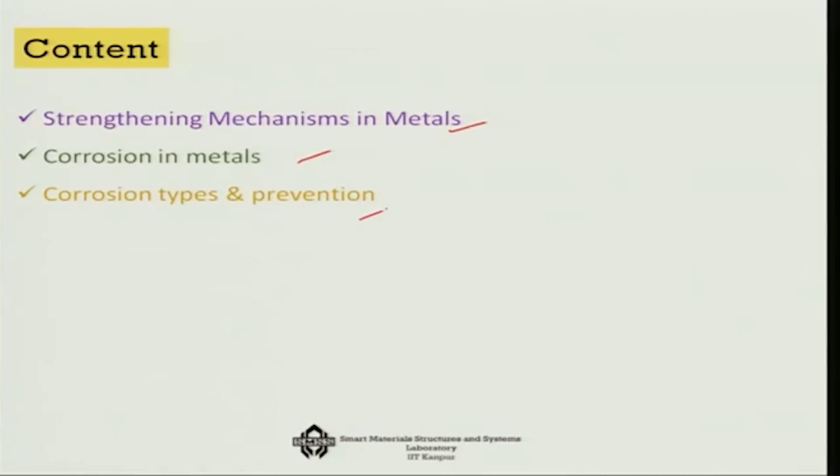strengthening of metals. Now, also because of the basic metallic nature, there are always susceptibilities to different kinds of corrosive environments. So, that also we will talk about in the second section. So, both strengthening and corrosion of metals is what we are going to discuss today. Okay. So, strengthening mechanisms in metals, corrosion in metals, and some of the corrosion types and their prevention. This is our object of study today.

Now, first of all, the strengthening mechanisms in metals. One thing we have already seen is that dislocations, if present in a metal, actually degrade the material properties. Now, as long as the dislocation is limited inside a particular grain, there is no problem in the sense that the macroscopic properties will not be that much affected. But if many adjacent grains get affected by dislocation, then that would substantially affect the mechanical properties.

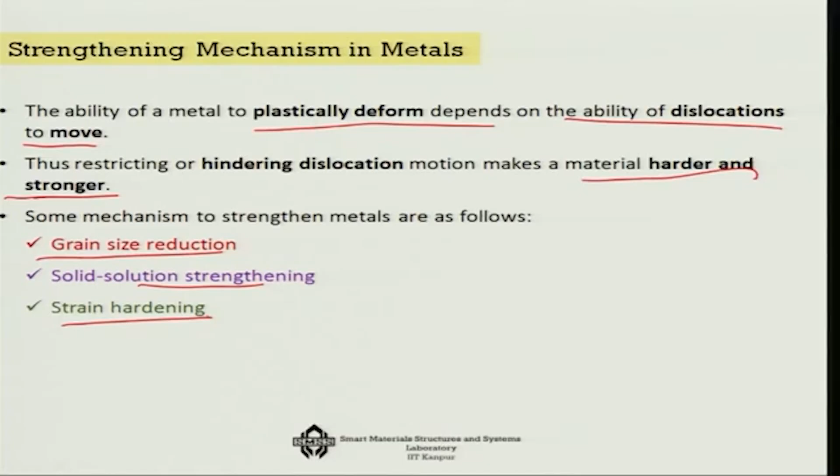So, the ability of a metal to plastically deform depends on its ability to dislocate and these dislocations to move across the grains. And if you can stop this movement across the grains, then you can make a material harder and stronger. And there are several ways by which we can do it. One is through grain size reduction, another is solid solution strengthening, and then of course there is strain hardening, precipitation hardening, etc. So, let us look at some of them one by one.

So, first of all, we discuss grain size reduction. Now, the grain boundary acts as a barrier for dislocations, as we have just said, but how does it act as a barrier for dislocation? There are two reasons. One is misorientation. That means if two grains are there and their lattices are not oriented, then it will be difficult for a dislocation to pass into another grain. Okay. So, there is a loss of alignment between the lattice structures of the two grains.

Okay. So, suppose in this particular example, you consider this to be one grain and then you have this one; the two lattices are not aligned. Okay. So, there is an angle. So, then it will be difficult for a dislocation to move from this to the next lattice. So, that is what is called misorientation.

Now, imagine that in terms of number of grains in a particular surface area, if you have more and more of these grains which are misoriented with respect to each other, then it will be more and more difficult for the dislocation to affect all of them on a statistical scale. So, the more grains it faces, the more difficult it will be for the dislocation to pass. So, that is one of the reasons why smaller grains, that means more grain boundaries, would very effectively stop the dislocations from moving across the grain boundaries.

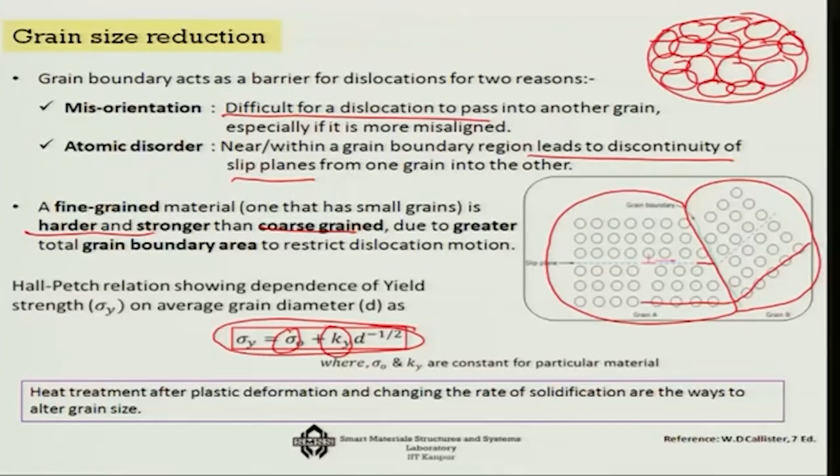Interestingly, Petch later saw that this is not only for mild steel; the same thing happens for other materials also, and people have found through experiments the values of these Hall-Petch constants. For copper, sigma 0 is 25 MPa and K is about 0.11 MPa meter to the power half; for titanium it is 80, 0.40; mild steel 70, 0.74; Ni3Al it is 300 and 1.7.

Now, one important thing is that it is K which determines how much effect d will have on the overall sigma y. Suppose I consider mild steel, with grain diameter from about 100 nanometers to about 1000 nanometers, and sigma 0 and K as 70 and 0.74, which means my sigma y is 70 plus 0.74 d to the power minus half, and I have given all these values.

So we can really see that as the grain size is increasing, even though not at a very high level, sigma y is indeed decreasing. So the Hall-Petch relation very nicely describes how the grain size affects the strength of mild steel, and similarly for the other alloys.

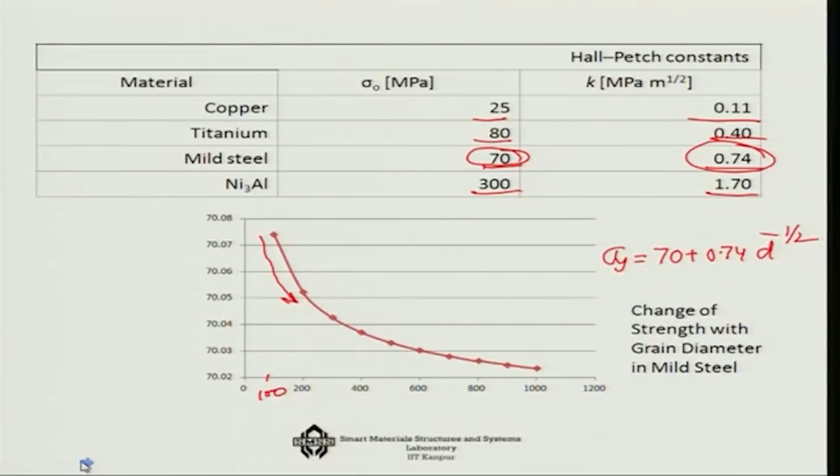Now, let us talk about another form of strengthening, known as solid solution strengthening. In this case the strengthening occurs because of pinning by impurities inside the grain, which stops the movement of dislocations, or the dislocation piling. That is why pure metals are almost always softer than their alloys. Why? Because in these alloys, as I talked about earlier, there is substitution of the alloying atoms in a solid solution, or in the interstitial spaces, for example.

So whenever these impurities go into interstitial or substitutional positions, what happens? If the atoms that go inside are larger in size, a compressive strain will be developed on the host atoms, and on the other hand a tensile strain will be imposed on host atoms by smaller impurity atoms. Larger atoms give a compressive strain because they take more space, pushing all the other atoms inside the grain. If you put a smaller one, the others come towards it, and as a result there is a tensile strain.

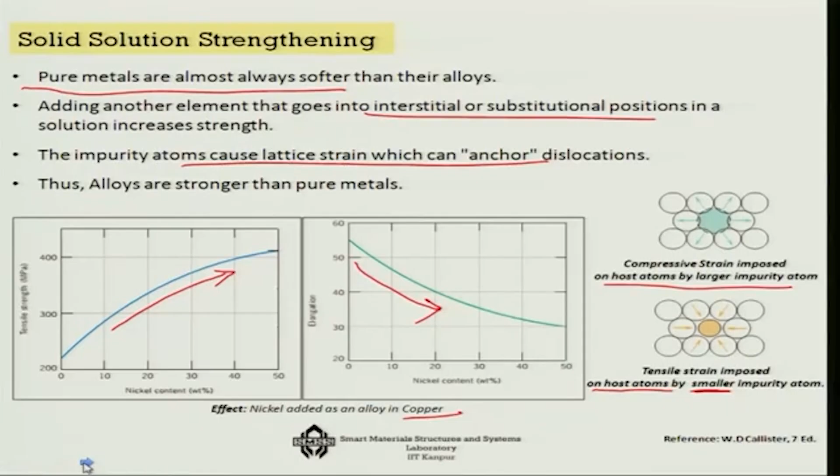Consider nickel weight percentage: as the nickel alloying in copper increases, the tensile strength increases and the elongation decreases, because it is becoming harder and harder. So that is another strategy of making pure metals harder by inserting impurities.

Now we will talk about strain hardening. In the other cases you are playing with the grain structure, but here you are not doing that. You are applying work hardening or cold working, so that there is a strain imposed on the nearby atoms inside the grain structure, and thus you are increasing the strength of the material.

That strain increases the strength, as you must have seen in the stress-strain diagram itself: beyond a certain percentage of strain, a strain hardening region occurs. The idea is very similar, but this technique is used in the formation of the metal itself, and hardening happens to the system.

For example, you can see here how the percentage of cold work changes the strength: while the strength is increasing, the ductility is sacrificed in this process. You can measure the percentage of cold working if you know the original area and the deformed area, and there are ready-made charts from which you know how much strength increase you can expect from strain hardening.

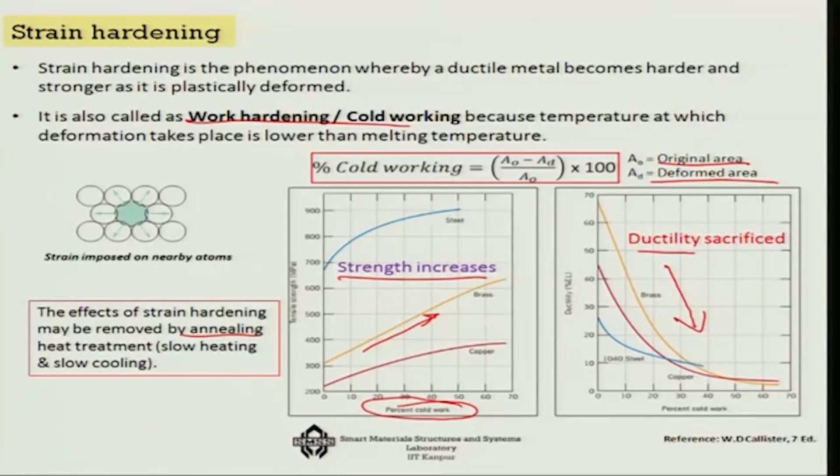So far we have discussed three methods, right. One is the refining of the grain boundaries, as these grain boundaries serve as barrier to dislocation motion. So, by having a more refined polycrystalline material, you can increase the strength. Of course, there is a degree up to which you can do it.

In fact, later on there is what's called a reverse Hall-Petch effect, that people found out that if you reduce the grain structure beyond a certain level, then this becomes counterproductive, and it actually depends on the size of the dislocation.

Okay. Suppose the size of a dislocation is 10 nanometer, and if you are bringing your grain structure to a similar level, then it would not be difficult for the dislocations to actually get piled up across the grains anymore, and hence instead of increase of the strength, you may see the decrease of the strength. So, the reverse effect may happen if you reduce the grains too much. So, there is an optimal level of grain size for every metallic system.

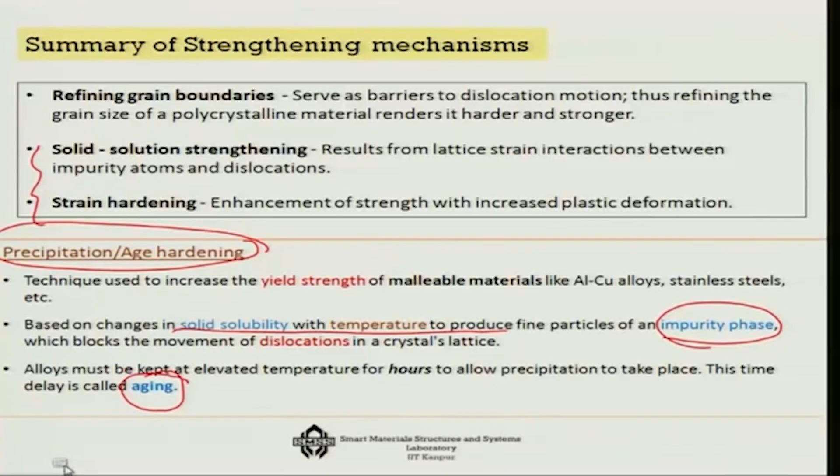So, for example, at a slightly higher temperature, there can be more impurities spread inside a pure metal, and they act like nucleation points, and then as you keep it at a very low cooling rate, gradually these impurities actually affect the grain formation, and as a result it affects the hardening. So, changing the temperature to change the solubility and later on allowing more time for the grain growth is known as aging. So, precipitation and age hardening, these two things actually go hand in hand. So, this is another mechanism in terms of controlling the hardening of pure metal.

Now, whatever we have discussed so far is related to the improvement of the metal. However, the metals also suffer from a problem, which ceramics would not suffer from, that they get corroded. I have talked about it in the very beginning. If you remember, I have shown you the periodic table and the relative positions of the metals, their tendency to give away electrons. So, as a result of this tendency, they can easily react with the environment, and those inorganic materials which can absorb these electrons can quickly react with these metals, and this results in corrosion.

And these corrosions are destructive, they are unintentional attacks on structures, and they are basically electrochemical in nature. You can see the corrosion of a ship or an automobile or a pipeline. In every case the corrosion creates a severe problem. Now, the material loss that takes place can be either through dissolution or through formation of scale or a film. So, that means the reaction takes place and the compound forms over the surface like a film or a thin scale.

For example, you take an aluminum vessel, put water in it and heat it up, and you do this several times, you will gradually see that there will be a layer of aluminum oxide formed over the aluminum at a higher temperature, and that will come like a green sheet over the aluminum. So, like a thin scale or film.

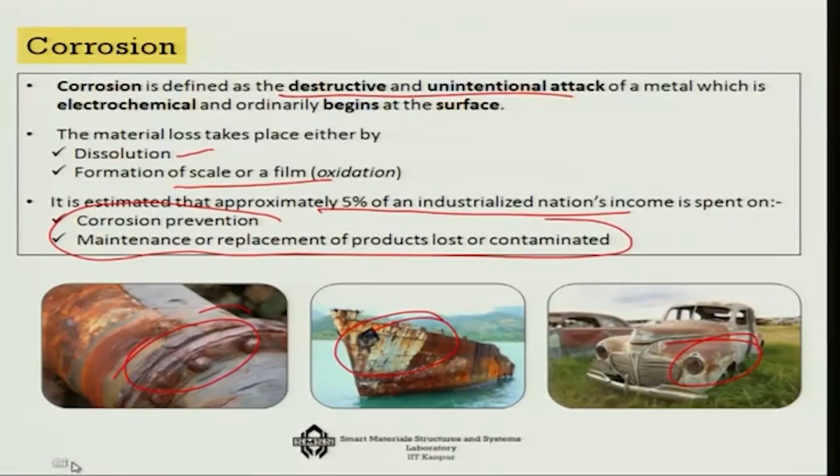There are various ways in which this takes place, and approximately 5%, even higher in some cases, of industrialized nations' income is generally spent on corrosion prevention, maintenance, etc. So, it is a big issue for various systems. Now, there are two parts of these kinds of chemical corrosions. One is the oxidation reaction or anodic reaction.

In this case, this is related to the tendency of the metals to actually give up the free electrons, and the other is the cathodic part, which is just the opposite part of it, where electrons are transferred to another chemical species based on their position in the periodic table, that they will be able to accept the electrons.

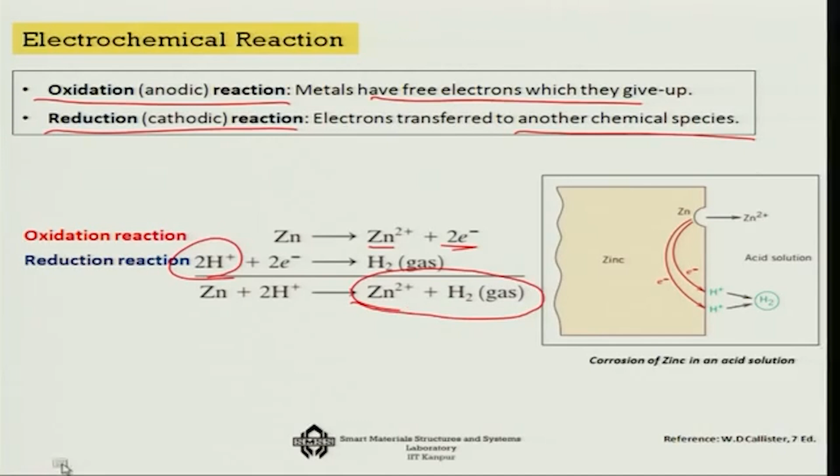For example, zinc. Zinc can readily give up 2 electrons, and this can be taken up by hydrogen, and hence the moment you keep zinc, zinc will be converted to zinc ion, and hydrogen gas will be formed. In fact, many times that is why zinc is given as a sacrificial layer coating, so that it very readily reacts and saves the metal. I will talk about the significance of this type of layers.

Now, when we select such a material to provide a protective layer over the original material, there is something called the Pilling-Bedworth ratio, PB, which is nothing but the volume of the oxide that is forming during reaction to the volume of metal that is consumed in the oxidation. So, if the PB ratio is greater than 2, what does it mean? It means a lot of oxides are getting formed and relatively less metal is consumed in the oxidation.

So, as a result, there will be high compressive stresses in the oxide film, and because the volume of oxide formed is quite high, there will be oxide cracks and flaking off, and this material then cannot be used as a protective material because of its tendency to develop cracks and flaking off.

If the PB ratio is less than 1, the volume of oxide formed is smaller with respect to the volume of metal consumed, and that creates another type of trouble where tensile stress is generated in the oxide film, and hence there will be brittle oxide cracks and thus it is unprotective. So, this is the case where the PB ratio is less than 1, and this is the case where it is greater than 2, where flaking off is taking place and the layer comes out. If the PB ratio is between 1 and 2, it very nicely sits on the base material, so it works very nicely as a protective coating.

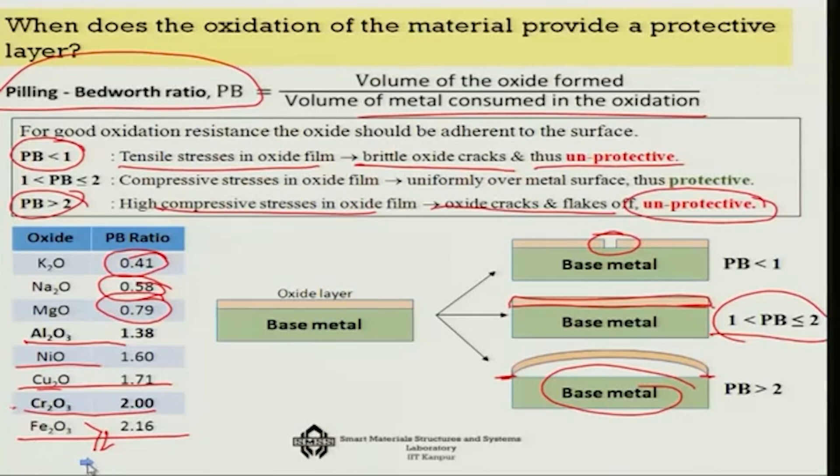That is why aluminum oxide layer is used in many cases as a good protective layer, and aluminum itself is much better in terms of corrosion, because a part of aluminum is sacrificed for aluminum oxide formation, and that gives a nice coating on the pure aluminum. Then there are the others, and chromium is possibly the last one. Beyond chromium it is greater than 2, and hence you cannot use it as a protective material. Thus the PB ratio works as a nice guidance for the choice of material.

The other point is the reactivity of a metal in seawater, particularly for seaworthy vehicles. This is very important. Susceptibility to corrosion in seawater reduces as you go upward in the series. Consider Monel. Monel is very heavily used today in seaside nuclear power plants because of its high anti-corrosion capacity, and we already discussed the advantage of nickel on copper in terms of high strength.

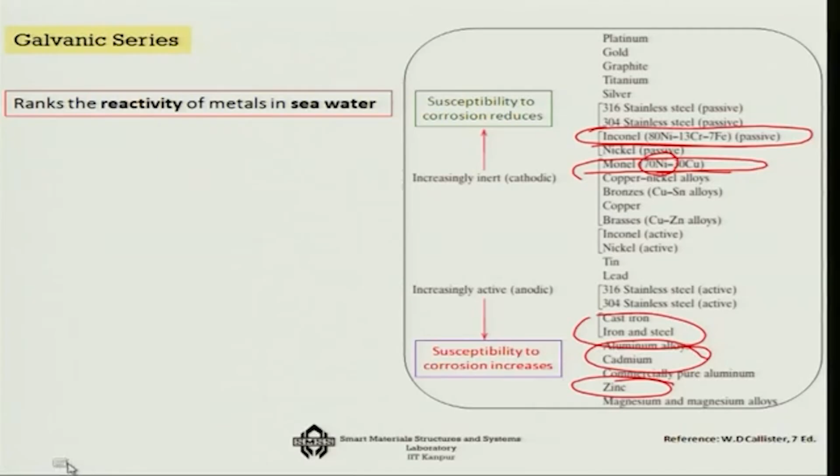So, both from corrosion and strength points of view, Monel is an excellent material, and Inconel is another one. In fact, the secret of making this material is very industrially significant; not many nations would like to part with these trade secrets. Then you have stainless steels, titanium, graphite; gold or platinum are even better, but you cannot use them. In terms of susceptibility, you should be cautious about using iron, and also aluminum alloy, cadmium. Zinc is highly susceptible, as we have seen. Thus the galvanic series gives us good guidance on the reactivity of metals in seawater.

Now, corrosions are generally of two types. One is the so-called uniform attack corrosion. It is the most common form of corrosion. As you can see, this is a jetty where the anchoring positions are getting uniformly attacked because of the salty condition, and the oxidation and reduction reactions occur randomly all over the surface, and maximum metal loss occurs in this kind of uniform attack.

The other one, which is known as galvanic corrosion, is a very specific case where two different types of metals are used for joining or doing some work, like a junction of two different types of metals, say a copper-steel junction. Now, this kind of thing happens in boilers, for example.

It happens in various places, for example in aircraft wiring systems. Wherever you are anchoring these wires, those are junctions, and there are dissimilar metals in the galvanic series. They come in close contact with each other due to mechanical actions, and the moment that happens, there will be a kind of cell formation.

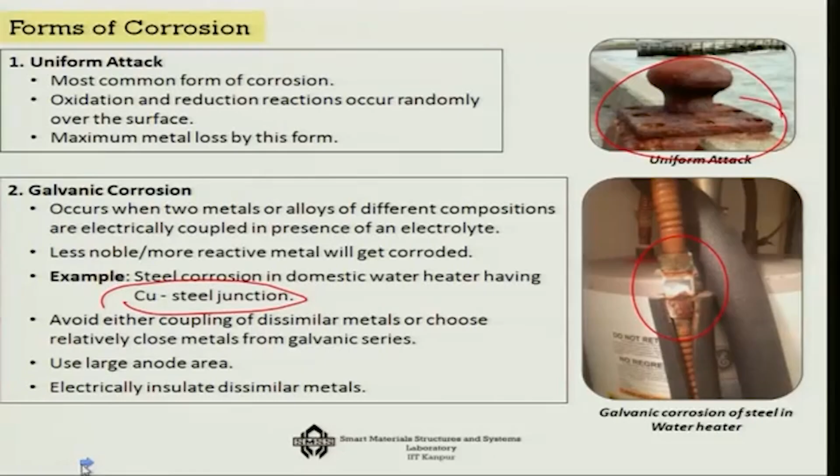So, one will work like a cathode and the other will work like an anode, and as a result there will be continuous corrosion of material from one to the other. So, this is galvanic corrosion. This happens in very specific applications where dissimilar metals or materials are in contact with each other.

Then there is intergranular corrosion. This occurs along the grain boundaries in some alloys like stainless steel if you keep it at a high temperature for a long time. For example, in steel, the heat causes the formation of chromium carbide particles along the grain boundary, and this creates corrosion along the grains. Hence this is particularly important when high temperature for a long time comes into the picture, particularly for turbine blades and things like that.

Then there is stress corrosion. Stress corrosion occurs in places where you have a high level of stress as well as corrosion due to chemical reasons. Here the high stress aggravates the problem, because the material gets weaker and a larger surface will be exposed, and as a result the two things help each other to increase the corrosion process.

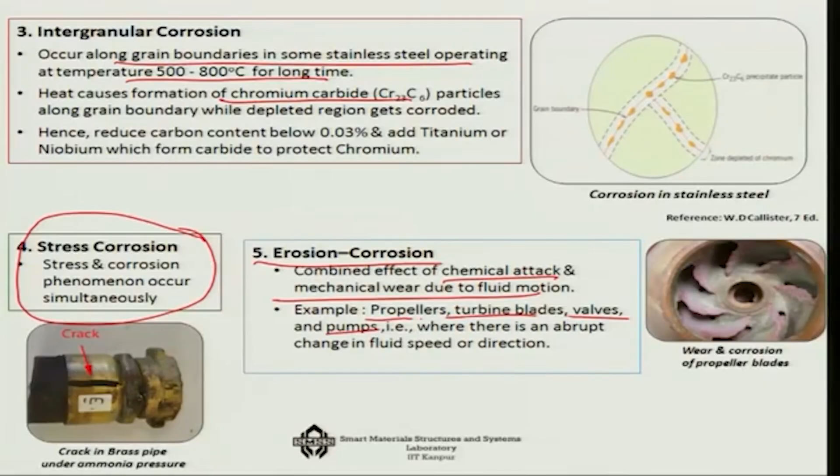The other one is the erosion corrosion process, which is a combined effect of chemical attack and mechanical wear due to fluid motion. For example, propellers, turbine blades, valves and pumps, even pipelines, where if the pipeline carries abrasive particles, there will be erosion as well as corrosion. So, there is a combination of wear and corrosion. Either stress and corrosion or wear and corrosion, these are even more severe conditions. It is not only corrosion, but something more than that affects the system.

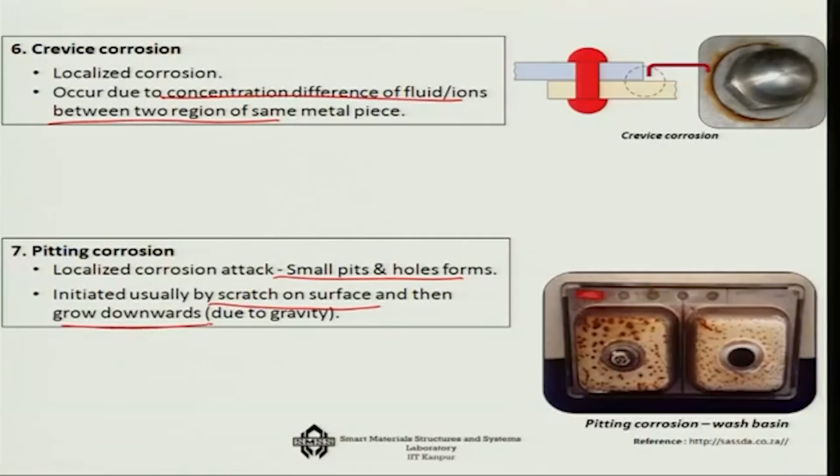Then there is crevice corrosion. It is a localized corrosion that occurs due to a concentration difference of fluid ions between two regions of the same metal piece. So, the concentration difference of fluid creates the corrosion. And pitting corrosion is like small pits and hole formation; it generally initiates by a scratch on the surface and then grows downwards due to gravity. So, these are various forms of corrosion that are possible in a system.

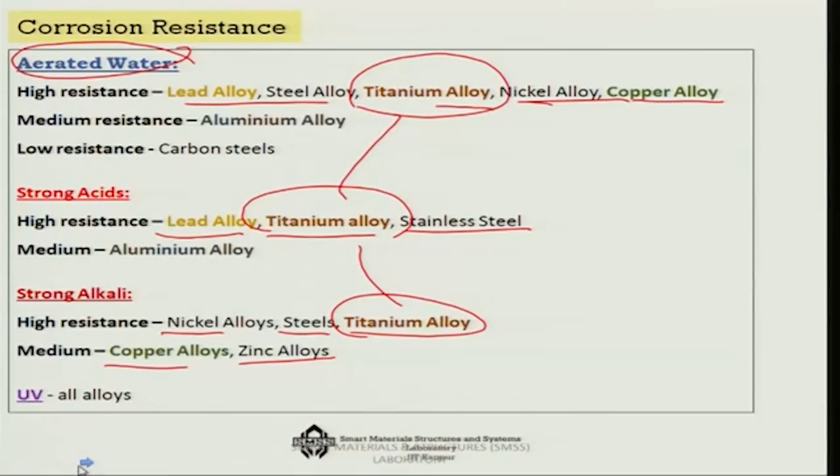So, one common thing we can see is that no matter what the medium is, titanium alloy is good in most corrosive environments. That is why they are heavily used for corrosive environments.

There are certain strategies for corrosion prevention. One is to use a material which, based on the PB ratio I mentioned, can form a good protective oxide layer. Another is to add inhibitors, for example amines and hydrazines, which can remove the oxygen, because oxygen creates most of the corrosion. Another is to reduce temperature, because we have seen that at high temperature corrosion increases. So, reduce the temperature to decrease the corrosion rate.

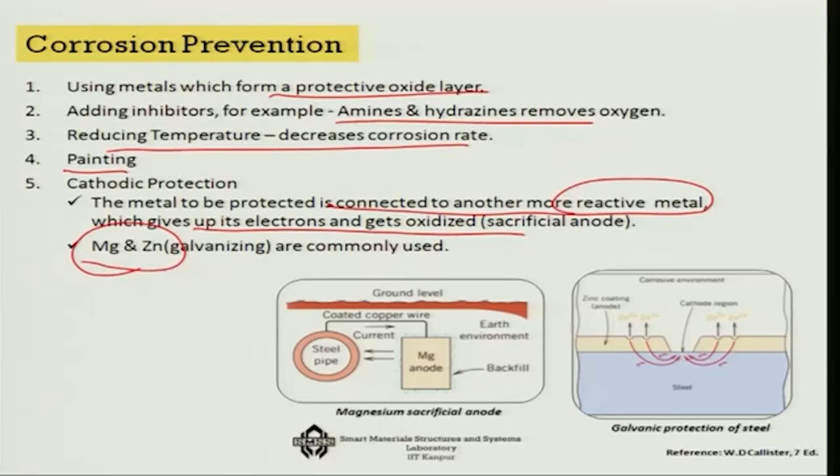Apply paints or chemical coatings, or go for cathodic protection, where the metal to be protected is connected to another more reactive metal, which gives up its electrons and gets readily oxidized in a sacrificial anode. This is why people used to carry zinc in ships in earlier days, because the zinc will be oxidized and sacrificed, but the ship metal will be saved. Magnesium and zinc are more commonly used for this purpose. So, these are the various methods for corrosion prevention.

This is where we will come to an end, and in the next lecture we will talk about ceramic materials, their classification and crystal structure.